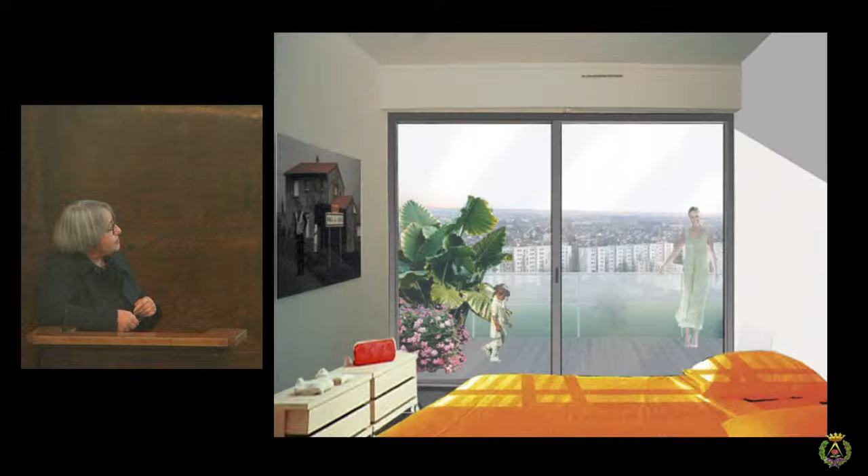From the inside, the same thing: from this poor small window, opening the wall. Very often in buildings of this period of construction, the facade walls are not structural—they're concrete or masonry, but they can be removed without affecting the structure, replaced by a large window and just a small balcony, and this changes the situation.

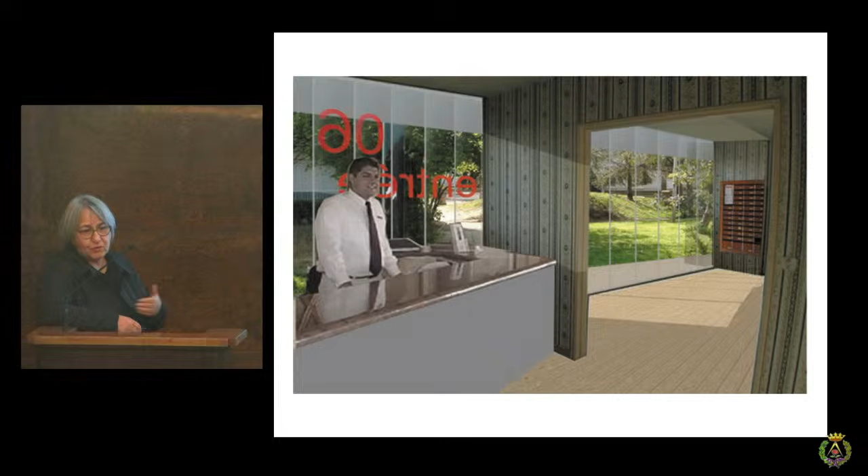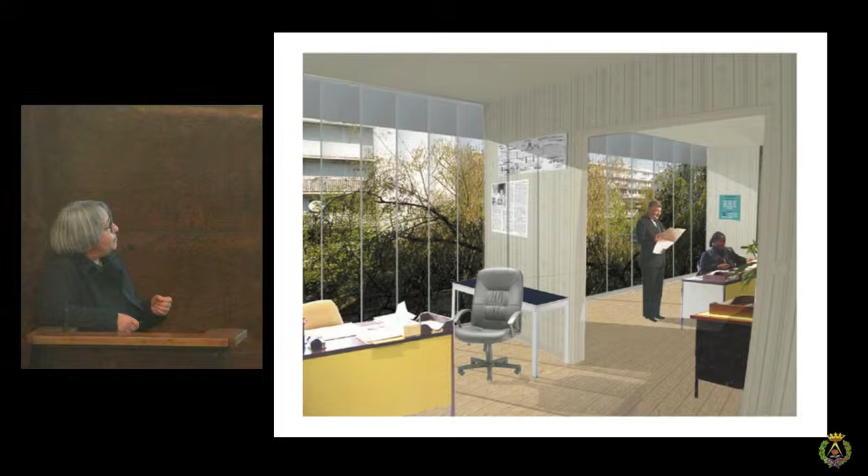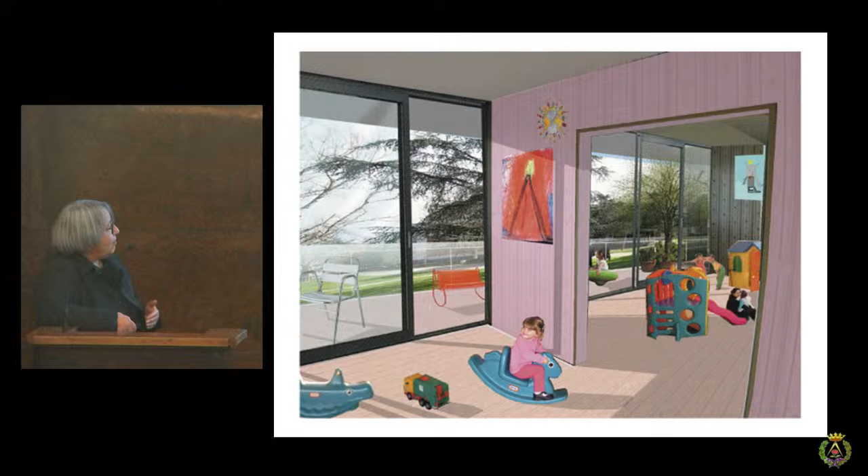But we also wanted to reconsider all the qualities that have been abandoned in many places. For example, the presence of a housekeeper—in most buildings today you don't have this anymore in the suburbs. Or using the first level for working spaces, since it's not the best level for living, or community spaces that today have mostly been closed because the management was too difficult.

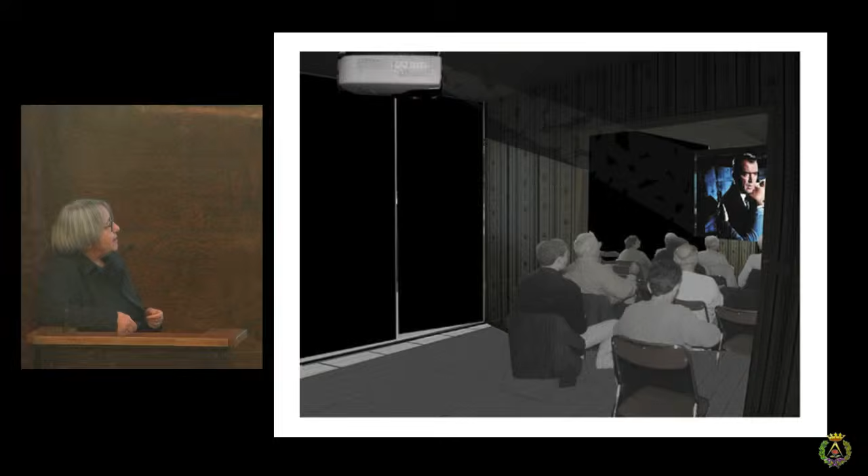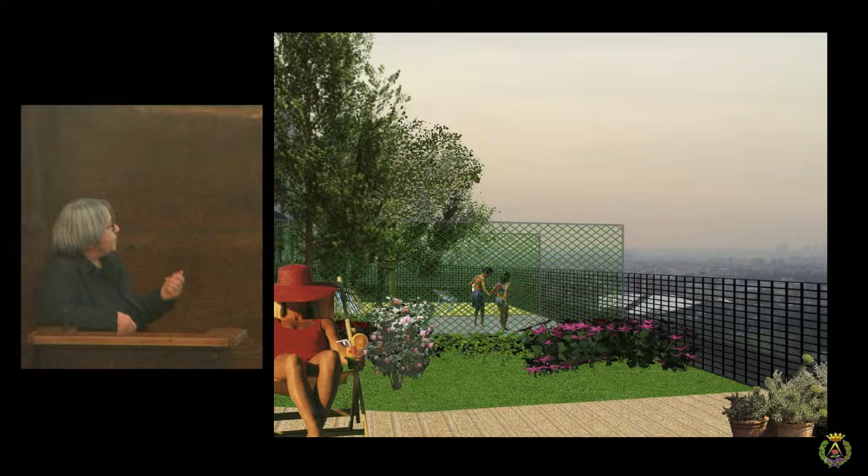So we wanted to reintroduce everything we know today that creates quality and good relationships for a community. Also the use of roofs, which could be easily transformed into community gardens.

And doing this research, we could also compare the numbers, because it's very important to study the cost, the economy, because without controlling these questions, you have absolutely no chance to convince that it's possible. In the case study we did, we could compare the cost: the number given by the government at the time for demolition and reconstruction of standard housing was 165,000 euros per dwelling. In the alternative of no demolition but transformation, we arrived at 55,000, sometimes up to 60 or 65 thousand per dwelling for sustainable transformation, placing all the buildings in a new long cycle of life.

So an example, since after this study we could make in 20 years 3 or 4 projects. This one is the most important, in the city of Bordeaux. We applied to the competition for the renovation of these 3 blocks that the city first wanted to demolish, but finally they didn't, because to relocate 500 tenants takes 10 years. So finally they abandoned the idea of demolishing.

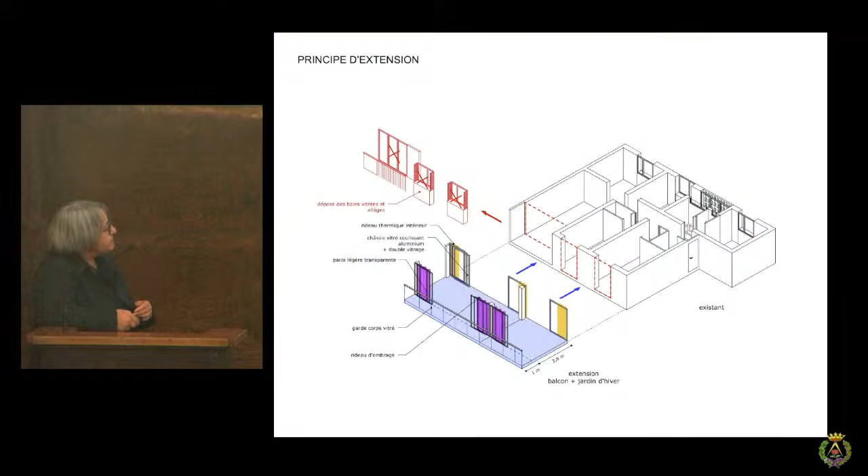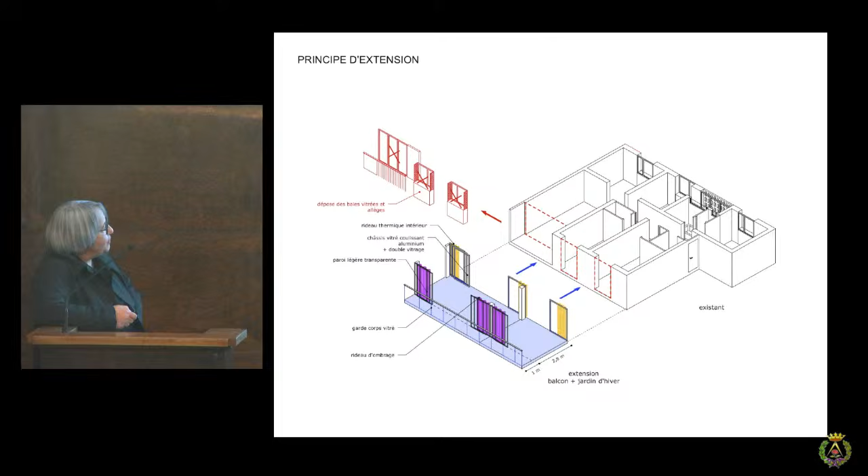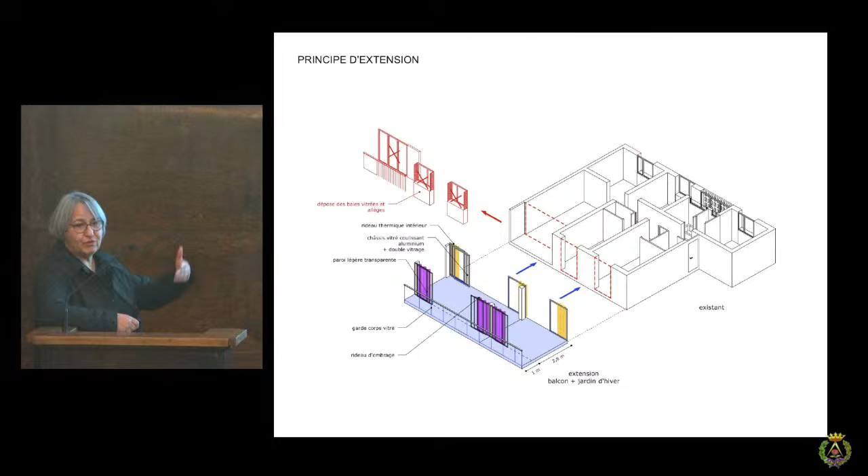So we proposed on these long slabs to make this extension - on one long side of almost 4 meters - and to transform all the small windows into large transparent doors, including this one, so that, keeping the structure of the apartment, we give this extra space in front where all the former rooms are connected with the new space, creating not only additional space but a lot of new mobility inside the housing.

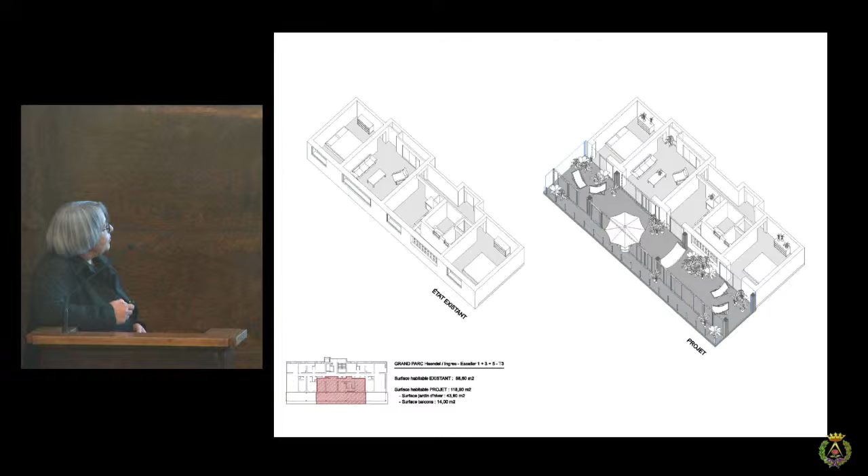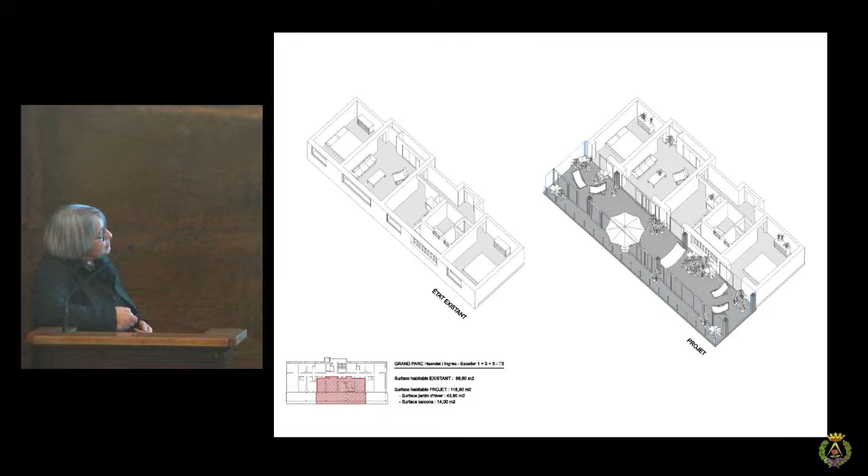So for example, one of these apartments which had a single orientation - with this addition, 60% of the apartments now have 2 orientations. So it means that this addition creates almost the same quantity of square meters as the existing space.

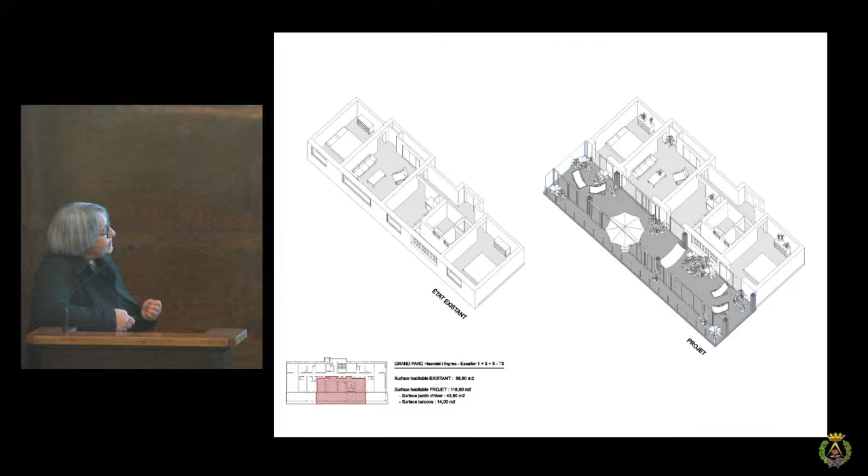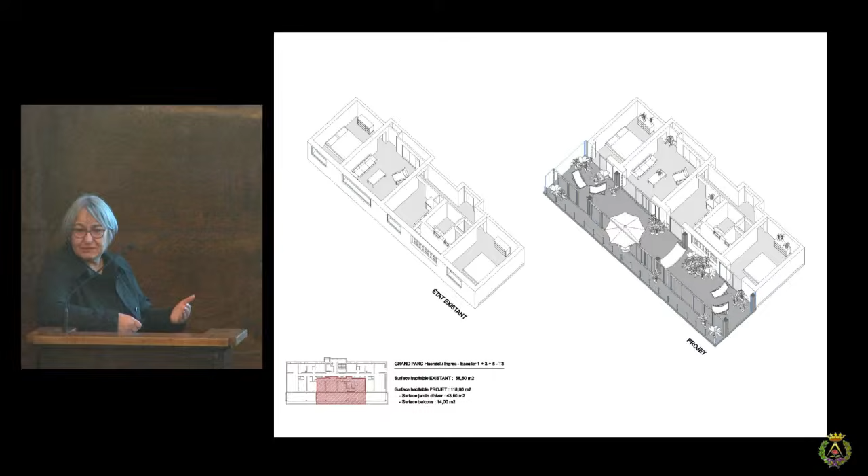Doing this also provides very good thermal efficiency. We replaced all the glass windows, but we didn't have to make any insulation of the existing wall, because the winter garden is proven by now, by many studies, to be more effective than 15 centimeters of mineral wool. And we applied this to all the levels.

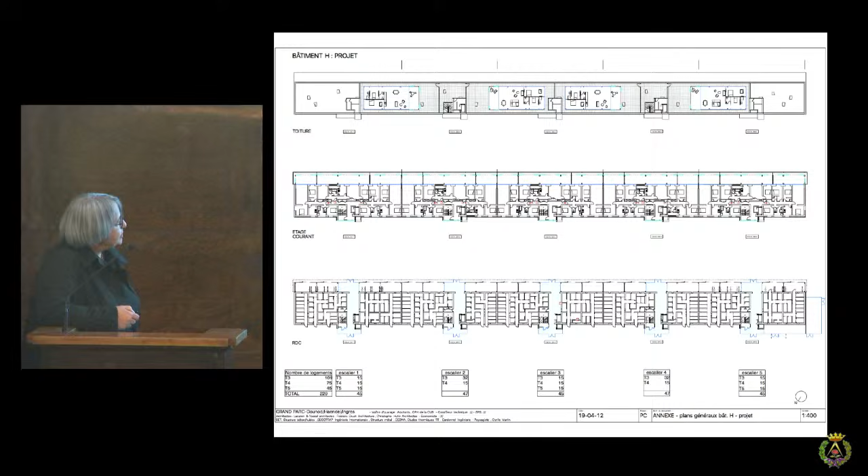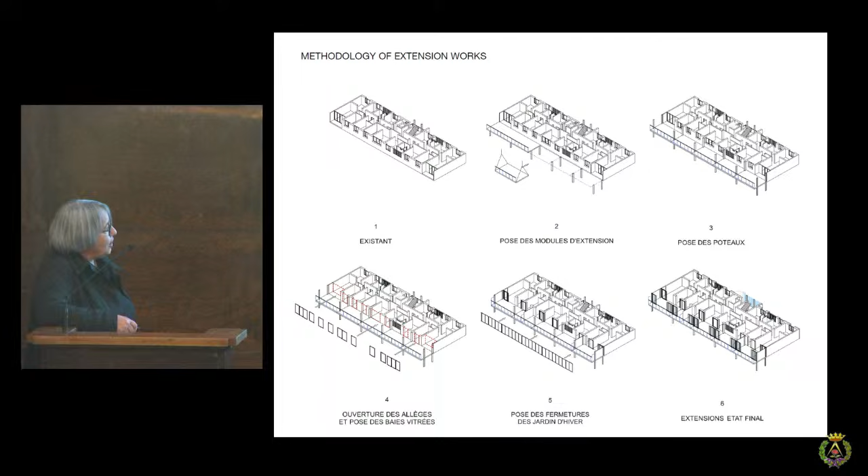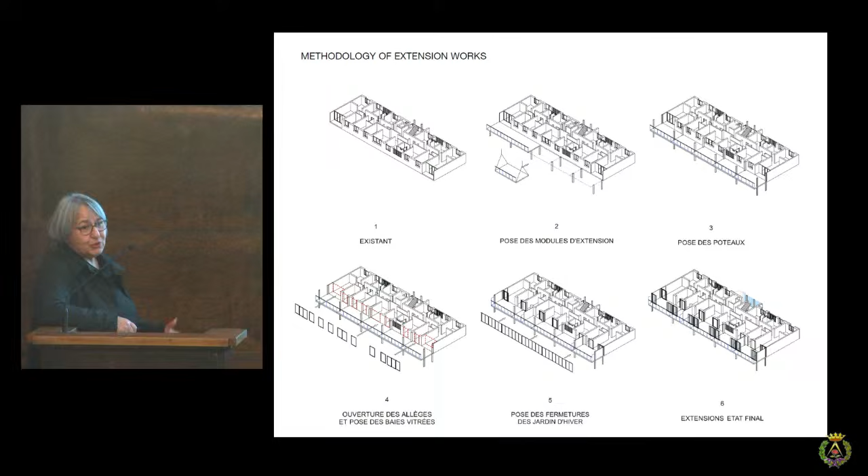On the ground floors there were also interventions to reorganize the entrance hall and create bike or trolley storage. This was also the methodology of works, because working on an occupied site means a lot of things must be very well anticipated to make sure you don't have problems when construction starts. That was the process we proposed at the competition stage.

Then there was also important work made to inform the inhabitants live, first about the guide of the construction, but also an email address or website where they could find all information updated all the time, and how to connect with the group, formed by one or two persons from the client, one architect from the team, and one worker from the contractor, who were permanently at the disposal of the inhabitants to answer any question or help, for example old people, to move a table or something if they needed it.

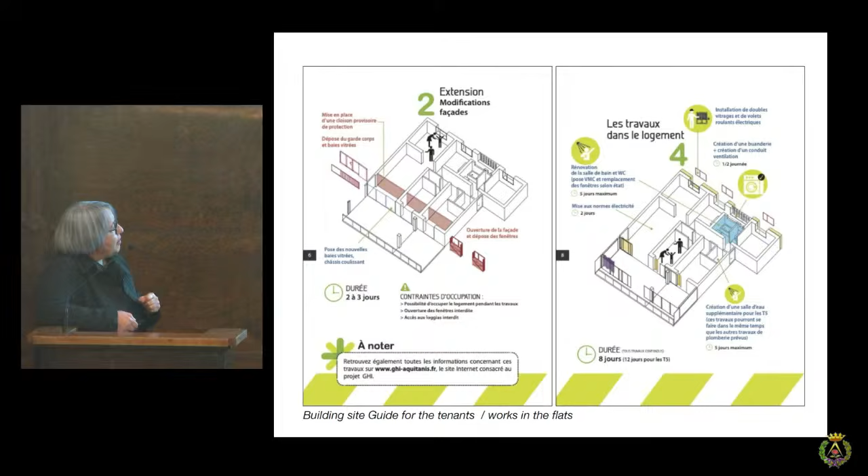This booklet explained in detail all the process, and there was a long discussion between the association of tenants and the owner about how it would be after the renovation, whether the rent would be increased or not, and finally there was an agreement that the total amount would not increase for the tenants.

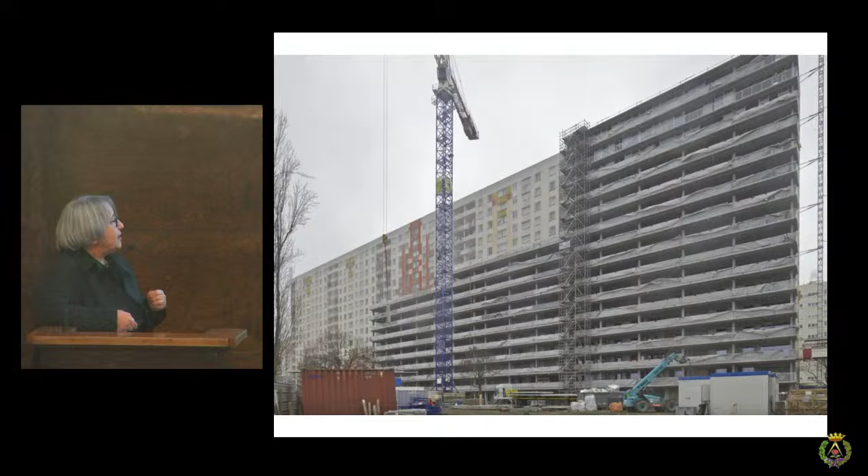Then we started the process of construction on one of the two big long blocks, 175 meters long and 15 levels. The process involved modules prefabricated off-site, brought by truck and mounted on site, and the final result.

The process of mounting was just this concrete module guided by two guys. It's very important because this old construction had very thin floors, so it was important to prefabricate elements that could match this thickness, otherwise we would have lost height.

The construction proceeded level by level, columns, floors, and when we had secured some levels we could start the process of transforming the windows into doors. This process should take no more than two days, that was a commitment, because more than two days was difficult for people.

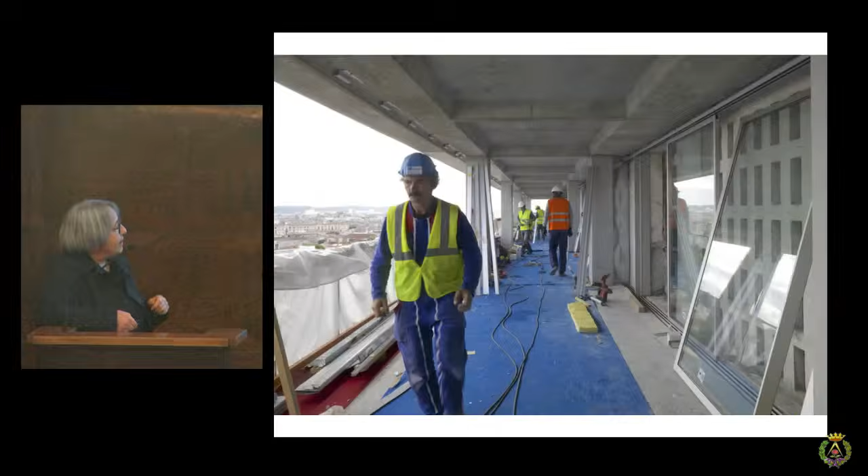The first day we removed the asbestos and the glass windows, and cut the handrail. The second day the glass windows came in, and afterwards we just had to renovate the interior after this change of the facade, the winter garden.

And a few weeks later, the inhabitants could get the use of the winter garden and start their appropriation.

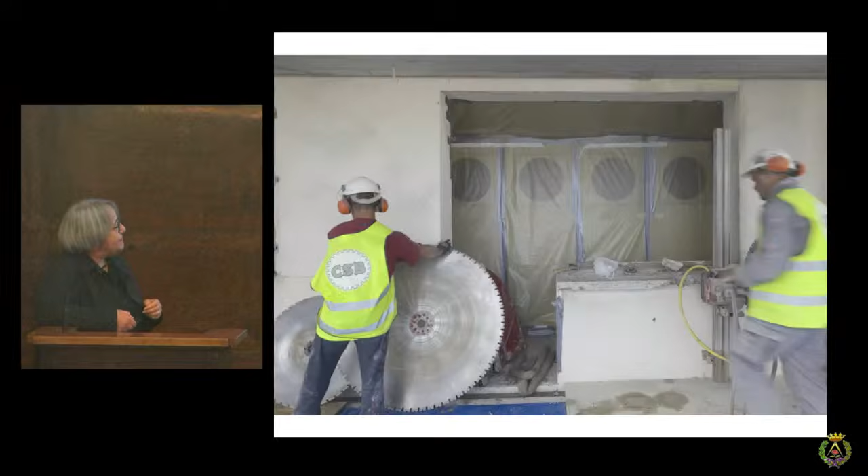Another way to view this: we put temporary partitions behind to protect from the dust and so on, to make sure it was acceptable for inhabitants to stay. So the process of cutting the handrails.

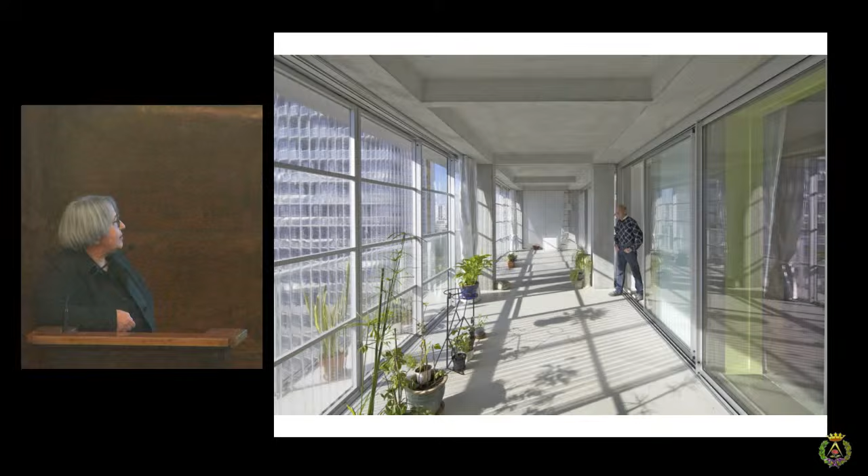The frames come the second day, along with the glass windows, and this was done afterwards from inside. But as soon as the glass windows are placed, the apartment can be closed, and the next step can come with openings to the winter garden and appropriation.

This is a change introduced from a basic bedroom, with the living room getting windows, a large window opening to the winter garden, as well as for the kitchen. This extra space is totally free of function, a place for appropriation.

So the transformation is really radical after this extension.

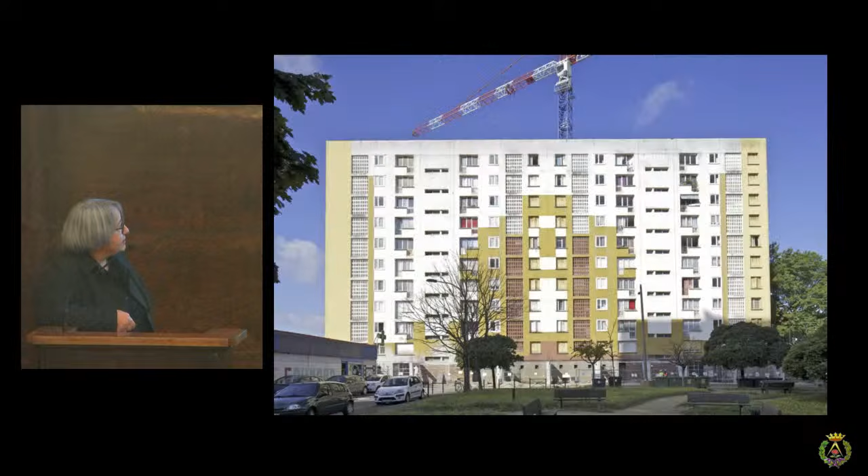We also added a few larger apartments on the roof, because there were only typologies of two bedrooms and three bedrooms. So we added some places on the roof with very light construction, dealing with chimneys. That makes a very interesting plan, with the chimneys inside the place. But very nice case studies with a fantastic view on the city.

And the transformation afterwards, now it's a place where everyone would like to rent, and the inhabitants who stay there and who supported the works now are very proud of their building.

Just a few numbers to explain the benefit that this project has brought. 100% existing conserved, 53% of surface added. More important is that by doing these winter gardens, but also renovating some heating regulation, insulation of the north facade, the consumption of primary energy was divided by 3.

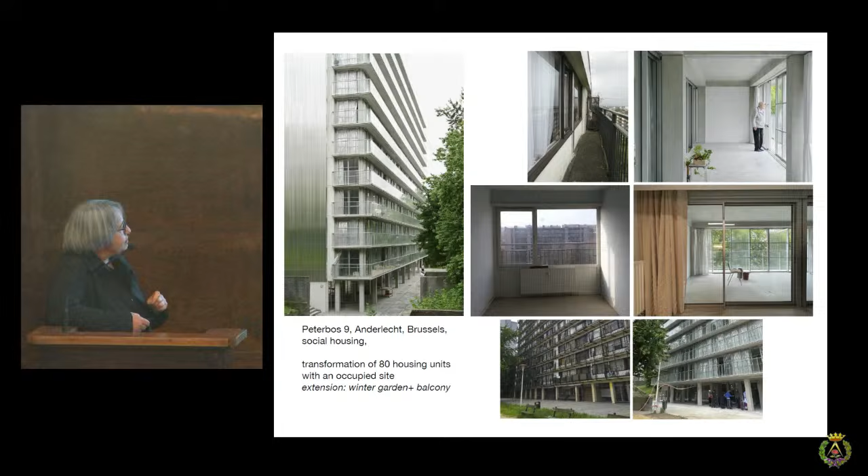And we did 40 additional housing units. So here again it's the process of transforming the existing. The most recent one is in Belgium, in the neighborhood of Anderlecht, where we did a similar process, also on an occupied site, and we completed it very recently.

So the transformation, as we are now convinced, is a very important opportunity to upgrade massively the quality of housing and to provide very good housing for all, affordable, with less money and in a more sustainable way. It's important also to observe that you can find this kind of situation in huge numbers in the city, everywhere.

It's important to think that every building, every dwelling can be transformed, every plot can be increased at the right measure, sometimes a little, sometimes not at all, for a sustainable and qualitative densification, and for the benefit of living space, uses and inhabitants, which is the most important aim of designing housing.

It was in fact in the context of a study kicked off by the municipality of Bordeaux, because they plan to build 50,000 new dwellings in the next 5 to 10 years, but they didn't know where to find the place to do it. Finally, they saw that it was good to build around the new public transport.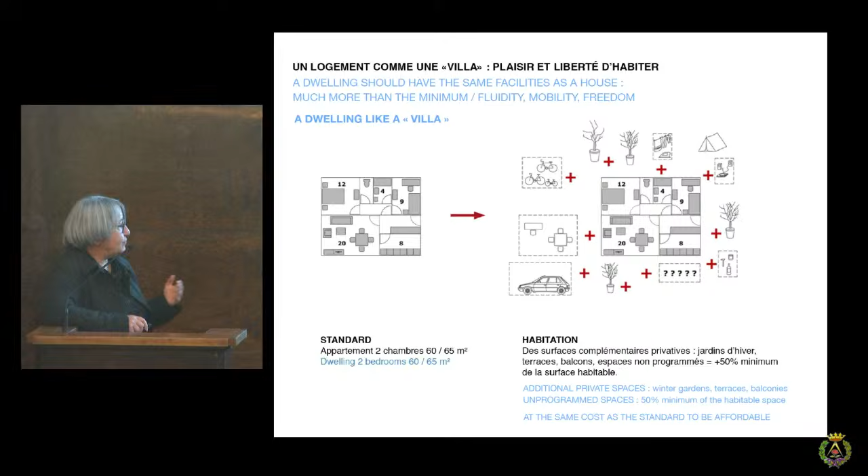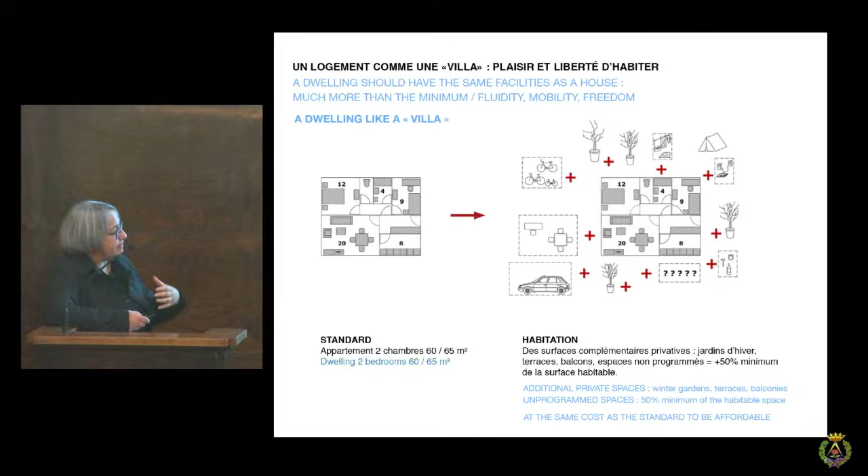So for us, all of this is important. Maybe it's not a car, today maybe we don't need one anymore, but this kind of extra space, which is given to the freedom of every person.

So we started. I'll go very fast because this house was built more than 30 years ago. We did it, but it was our goal at the time, for this family of workers with low incomes who wanted to build their house.

As young architects, we were really involved in doing something much, much better than any standard that they were ready to buy from a catalog. So we introduced here this principle of building double.

It means that if you need 60, 65 square meters for a 2 bedroom house, we can build 150. This is what we did for this house, with this greenhouse exposed to the garden and to the east, which is also very important in terms of climatic comfort and efficiency.

Finally, this space has become an extra living room, not at all a greenhouse, but an extra space, which is the place that changes the most often in the house. Because inside, the sofa is always in the same place, the beds too, but this place is always changing during the seasons and according to the mood of the people.

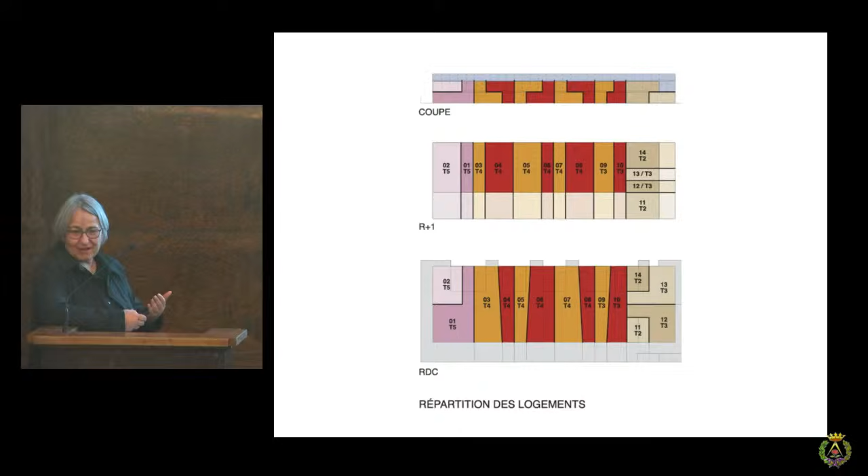But it's important, because if you talk about extra space, it doesn't mean that all the spaces are similar, and having also some darker space inside the house can become a quality too. So we experimented with this, and it worked very well.

The construction is very simple, because to keep the budget, it was important to think about how to build this space. We used prefabricated construction to make this concrete table, and on top, 3 rows of agricultural greenhouse that we used with a whole system to regulate the climate inside.

And this is the result - for example, this apartment has this part here, plus here, and a winter garden. So the result is, for example, for this apartment, a 4 bedroom dwelling in duplex.

The surface is 165 square meters, while the standard requested was 100. The construction cost was in 2005 - just as a comparison - 90,000 euros net, exactly the same price as the 100 square meter version.

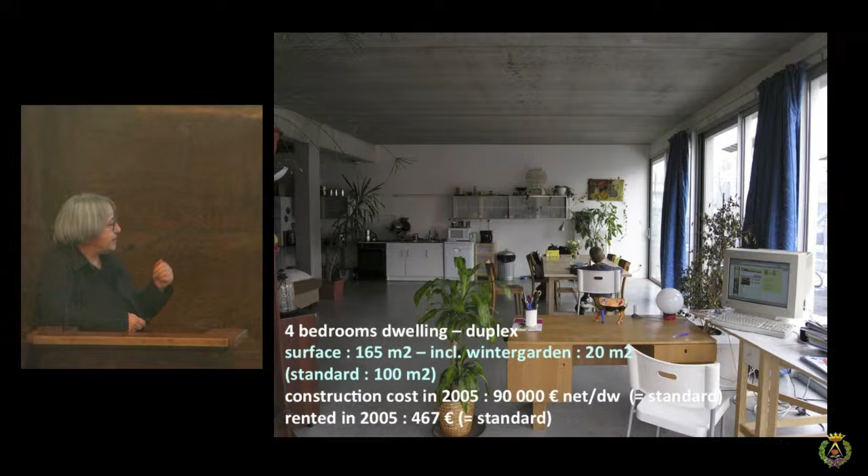And our client, the owner, was very good, because we discussed this issue of more surface, more rent, which is always the answer you get when you want to do more, to give more. You get this answer: no, you cannot do that, because otherwise I should increase the rent, and it's not affordable anymore for social housing. But in this case, because this client was very open and wanted to change something in the way they were doing things, he accepted to revise this strategy.

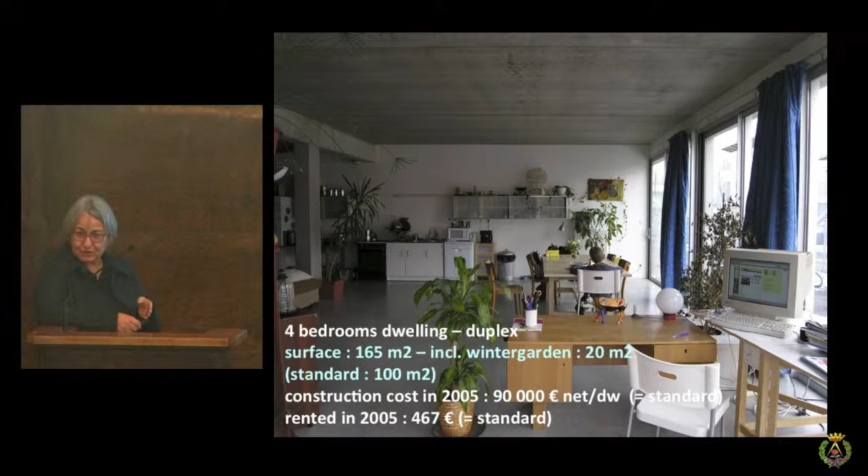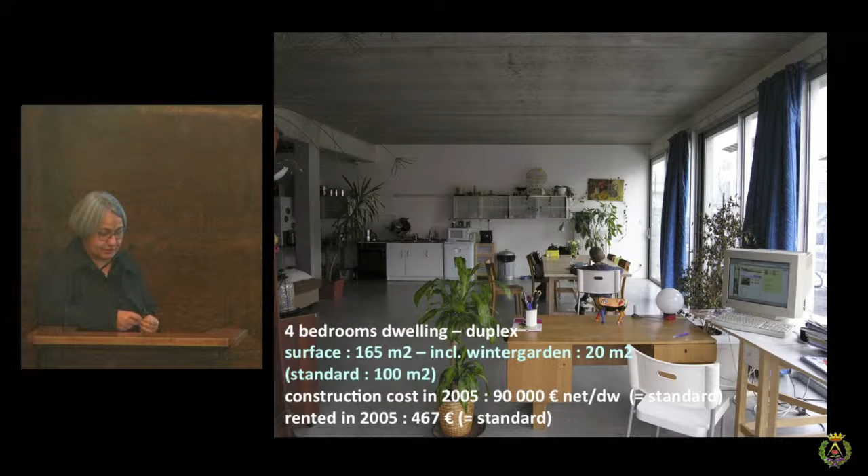Finally he said, but in fact it's not a law, it's a practice that has become a law. So finally, I don't feel forced to respect something which is not a law. And he decided finally not to rent based on square meters, but based on the cost of the apartment - as if we had made 100 square meters for the same cost, the rent would have been the same. So of course, it's very interesting when you can work with people who also have the desire to invent in their own field.

So we already experimented with this - this was completed in 2005 - with the whole system of deep facade with 4 elements, thermal curtains, and very recently we published research with the engineers of Atmoslab. Raphael is here.

They recalculated, because at the time, in 2005, there was no real calculation, just a kind of intuition that we arrived to convince, based on a very accurate study of how greenhouses are working, especially with cross-ventilation that immediately cools down the space, or the sun immediately brings a lot of temperature.

Finally, because it was subsidized, we had to prove also that it was working. But it was difficult.

The administration said no, you will not have the subsidies because it doesn't work. So finally we went to the Ministry of Housing to ask for a deviation, and we proposed our project with our very intuitive calculation demonstration, and they laughed a lot. But they said, we laugh, but it's because you are very clever, and of course your project works amazingly well, but you are not able to prove it because the models don't allow these kind of things.

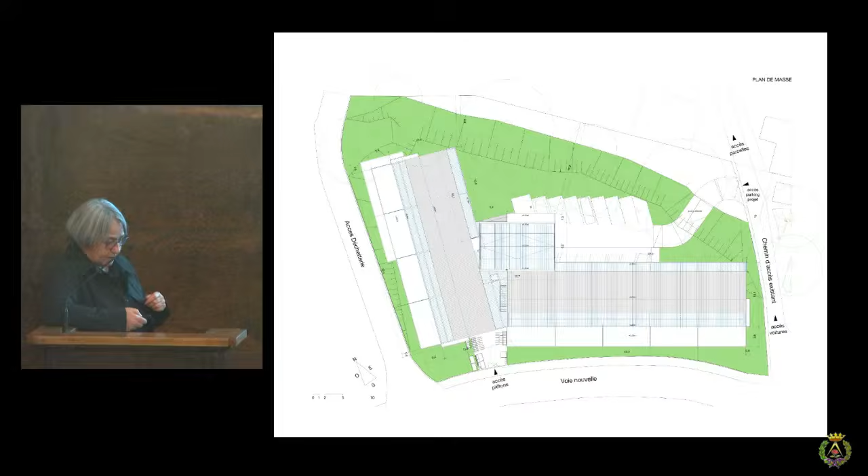Which has two levels - one level for the summertime or springtime, under a greenhouse, but we have a similar one on the ground floor for the winter, which is inside and heated.

All the apartments, which all have one bedroom, kitchen, living room, around 52 square meters, have this additional space of winter garden plus a large terrace, which all in all makes something like 100 square meters of usable space. Again, this extra space made by this complex facade.

We call that winter garden, but in fact it works as well in winter as a buffer zone as in summer, when it's totally open as a kind of loggia protecting the facade from the sun ray. So it has, in a way, two interesting climatic actions.

So even the bathroom opens to the corridor, which was in a way well accepted. And for the ground floor, instead of a terrace, they have winter garden plus a garden.

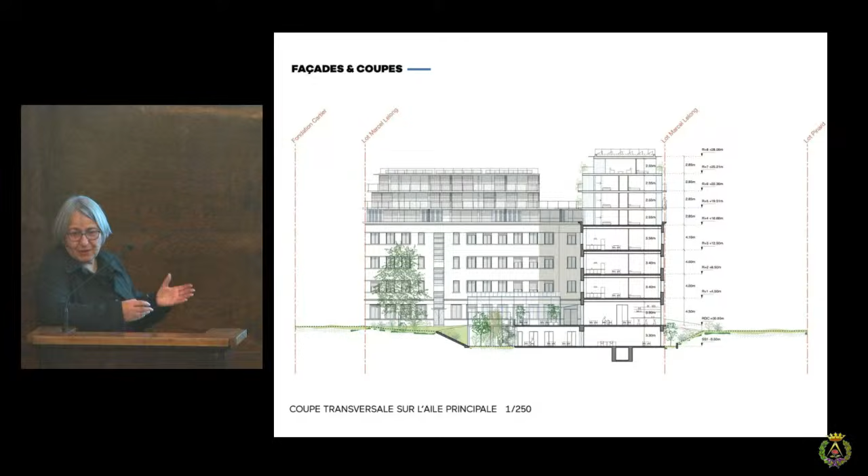So the proposal was to keep the building as it is, with a simple renovation and reorganization of the space inside, and to create additional levels on top, with very little need of reinforcement, because it seems the building already planned in the project to accept more loads on the foundation. So we have not many reinforcement works to do, following the shape of the setback and so on of the city.

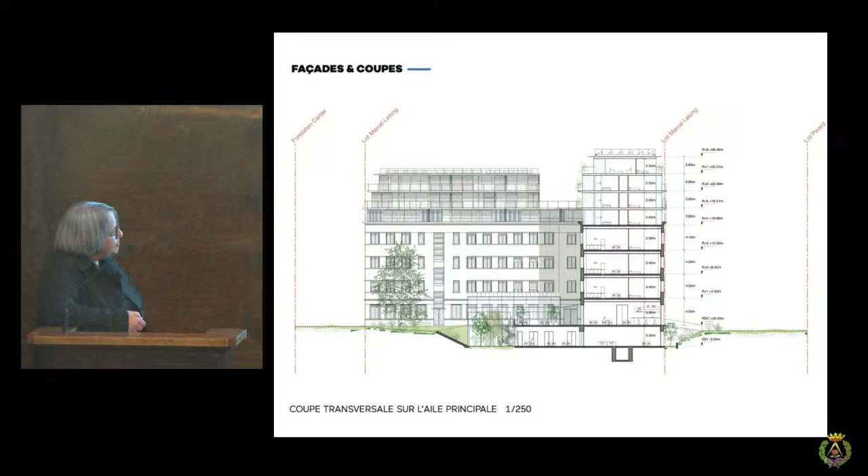So we have proposed this section with some levels which are half in basement, half outside. The proposal was to reuse all these parts here as atelier, but some places here for a cafe, community space, and to have all the housing above this level, from the first level in the existing and the new spaces.

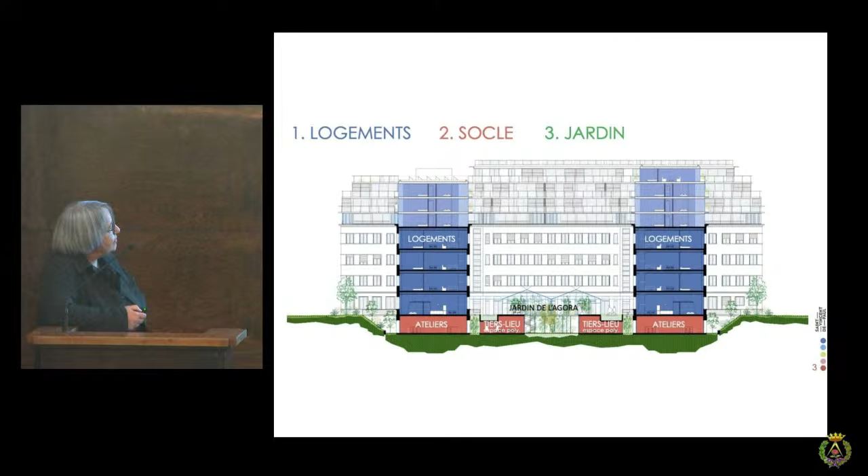So this is renderings. We didn't start construction yet because it's a very bourgeois neighborhood, and for all the new projects here there is prosecution from the neighbors because they don't want to see anything changing in their neighborhood, and because they claim it degrades the value of the place.

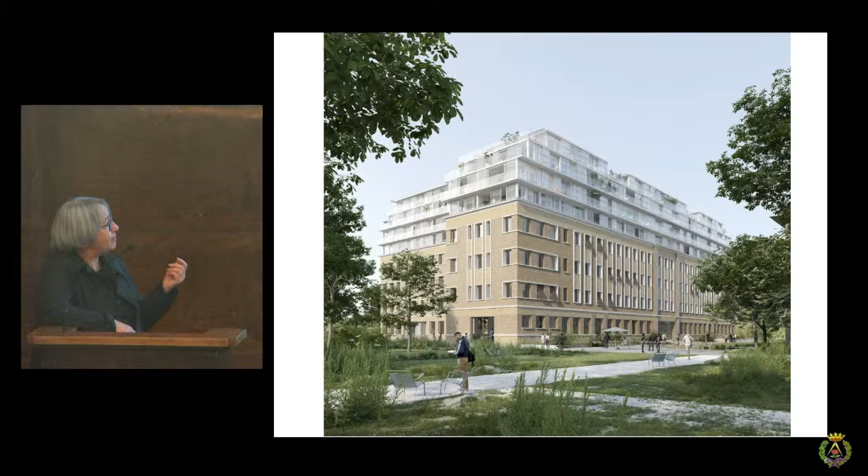So for 2 years we are waiting now for judgment. And finally, the judgment just kept a very little argument. Maybe now we can start soon the construction.

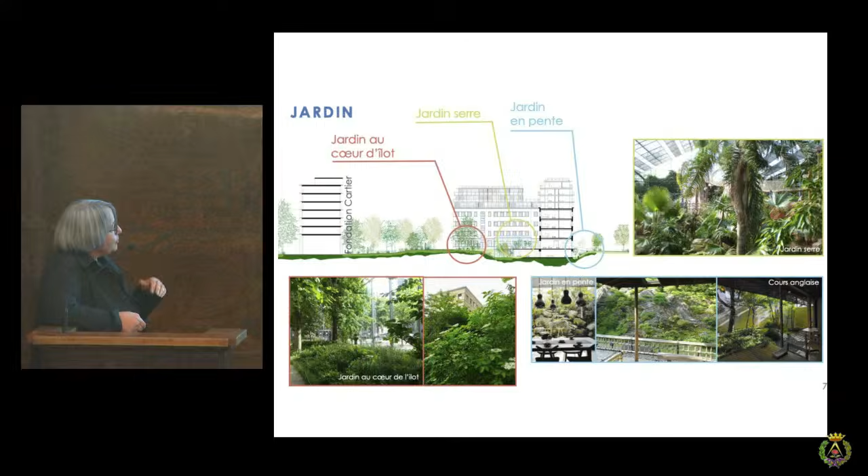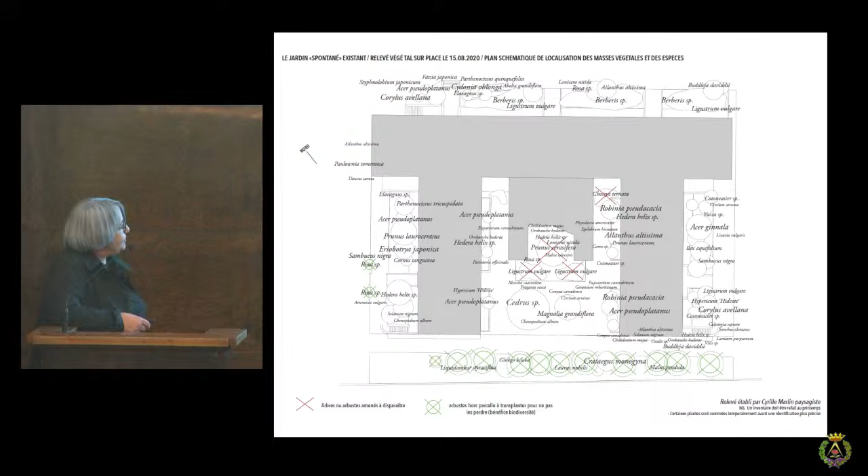We also did, because it was a very old garden, an investigation with the landscape architect on all the existing plants to keep them at the maximum. They did a survey of all the plantation to make sure that, except those already dead, we can keep them and integrate them in the garden. We have just added this greenhouse, which is recovering a former barrack that we removed just to change it.

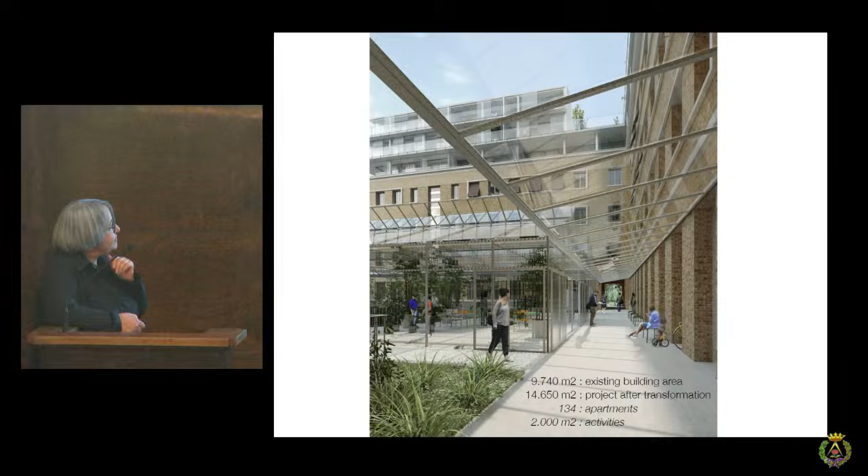So this is just a few numbers: 9,740 existing square meters, 14,000 after transformation. That means 130 apartments, all of them more than 100 square meters, and 2,000 square meters of activity. In fact, what we try to do is use the existing structure, as I told you there was just some columns, but we try to use it without changing too much the structure.

So almost all the apartments have double orientation, with a rule that every living room should have at least 3 windows, and a fourth one if the kitchen is connected. This gave us a kind of measure, because the client is a private developer, and immediately he asked for cutting into having a corridor. But finally we arrived to keep the strategy, and finally it's accepted.

As well as a strategy of not doing any difference between the 20% of social housing and the private housing which will be sold. So we don't know where they will be located, because we have insisted to make them all similar.

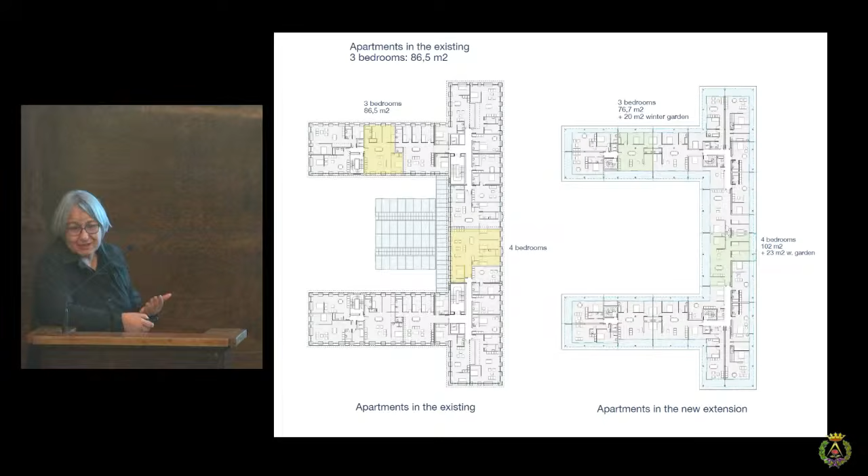And in the new part, it's a different organization, because here again it was not interesting, neither possible, to open the windows, because the quality of light is enough good inside. So there was absolutely no necessity to change anything. We just took care to give enough windows for any apartment, while in the new construction we have this winter garden surrounding the construction and all the apartments which are inside.

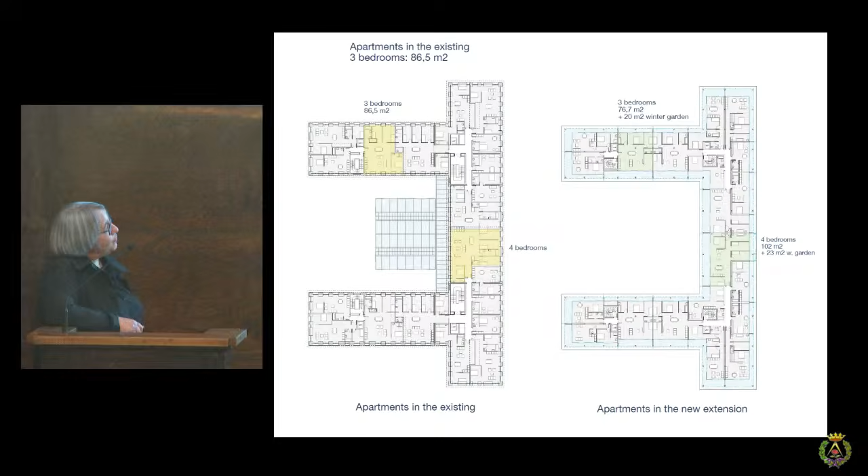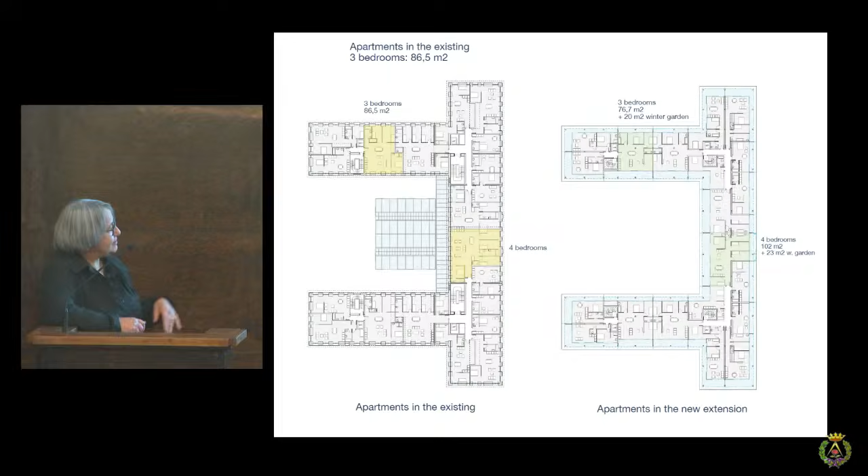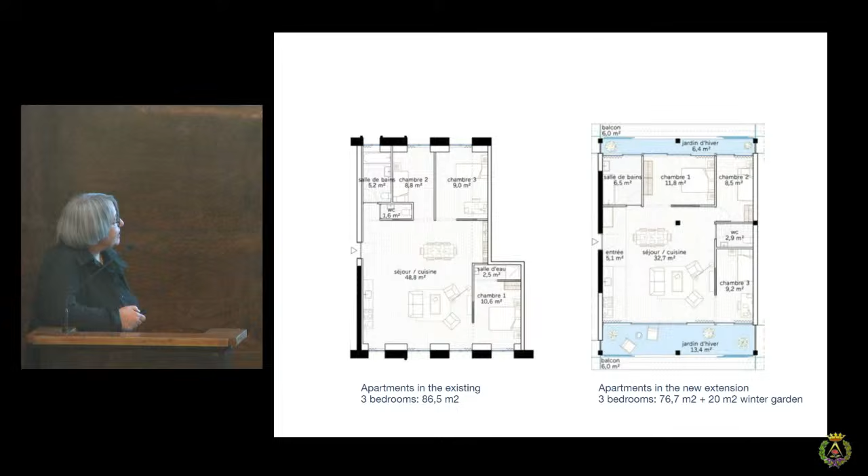4 bedrooms here of 100 square meters, and here 3 bedrooms of 76 square meters plus 20 square meters of winter gardens on both sides, which is also very efficient for energy saving, because the city of Paris has a very high level of requirements in everything. We should not send any rainwater into the network, so there were a lot of things we had to address. I won't explain more, but just to show you here the windows of the existing building, and this large apartment, because we use the full depth of the existing building — and this is the new apartments.

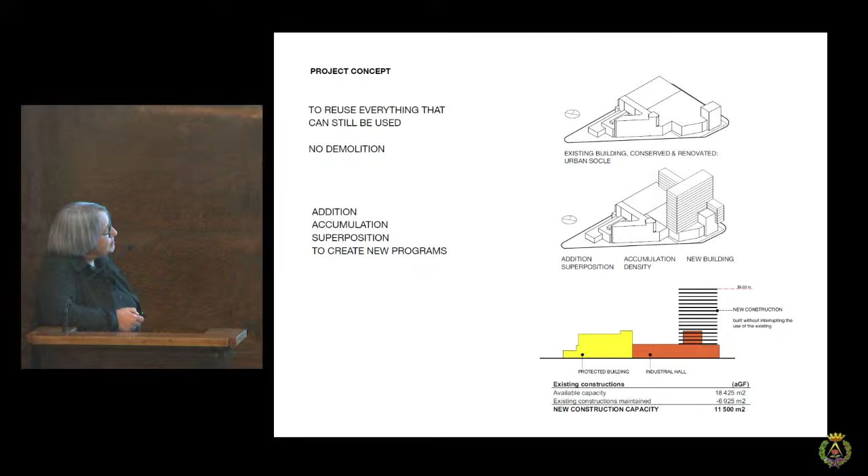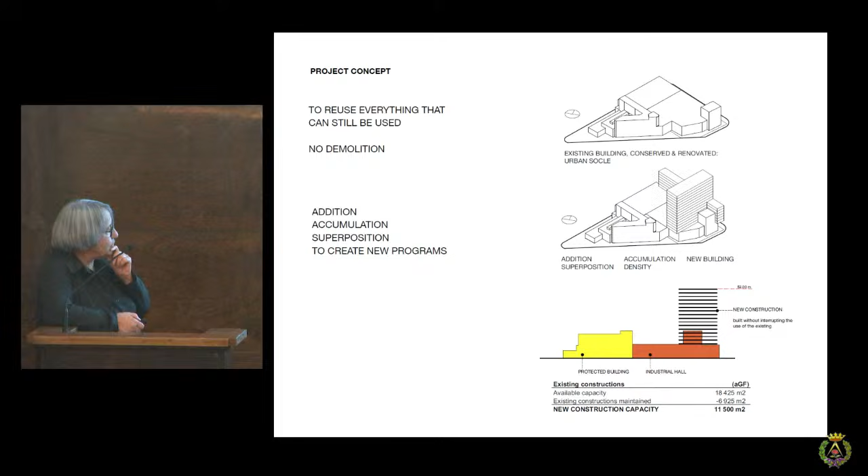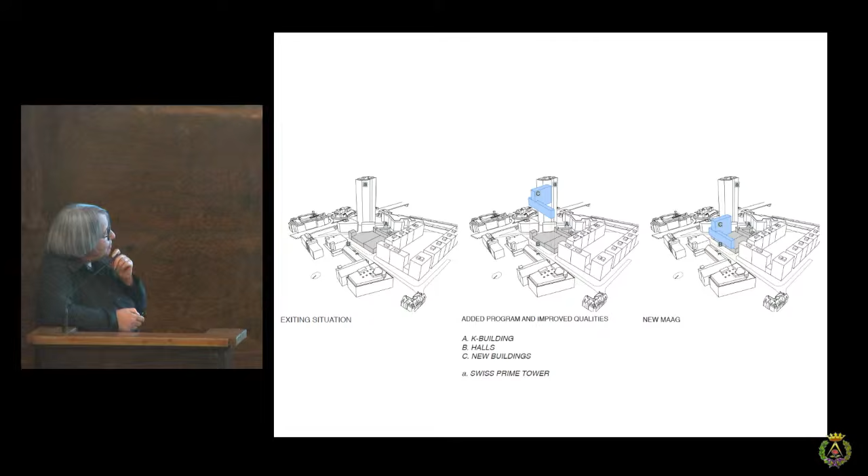Following our general strategy, never demolish and so on — today this is a very popular place where you have a lot of concerts, and also the Philharmonie was there during the renovation of their opera house. In the competition, we proposed not to demolish, to use everything that can still be used, no demolition, and to proceed by addition and accumulation, creating new blocks which take the columns in places which today are not used for the concert halls but more for storage, or this one on the edge with all the columns outside. We reconfigured all this construction into a new one with the existing kept — the protected building, but also the industrial hall — and added all this new surface. In a simple way: the existing situation, these new buildings, but all the other buildings are kept, and we adapt, reuse, reformat spaces inside.

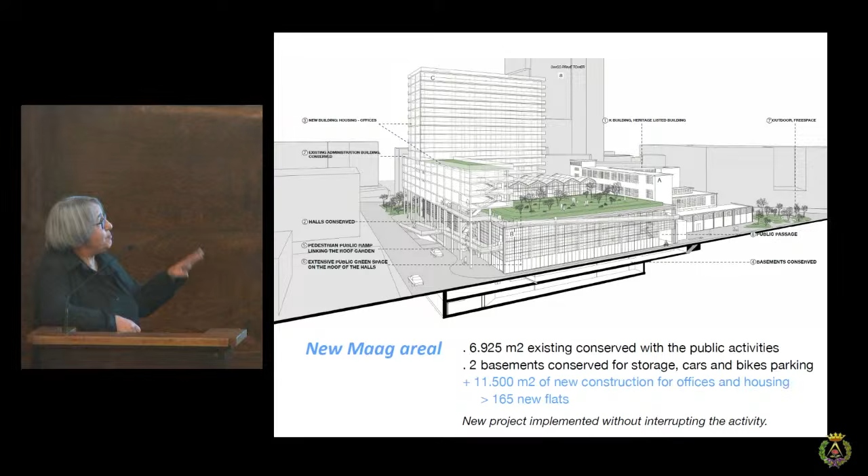So finally we lost the competition, for a simple reason: there was a new master plan. The new master plan asked for a larger street, and the new limit for construction was there. But because we were keeping the existing building, we were outside the limit of construction of the master plan. So in a way it could not be accepted, which is a bit ridiculous, because this building was there before the new master plan. There was a huge discussion in the city, a lot of protest. So finally, the situation today is that nothing has been built — it's still the same situation. But the city has cancelled the master plan and agreed that this building should be kept. Of course there will be another project, but finally this competition helped to change the city rules.

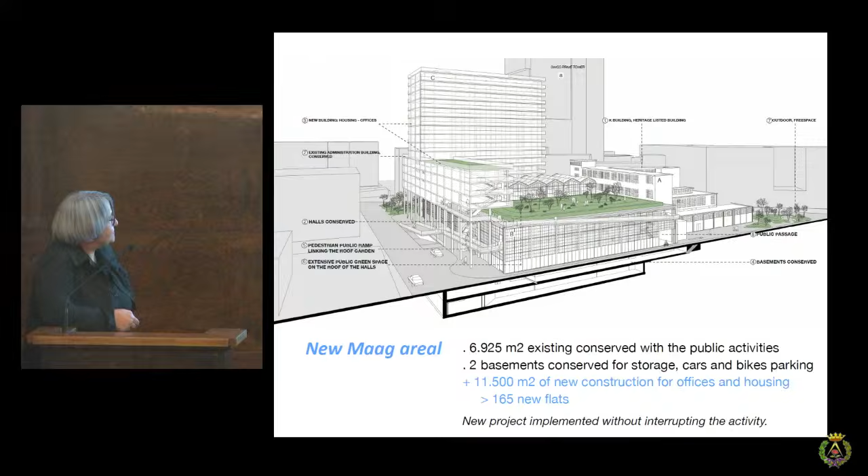Okay, and these were renderings of the situation — the old concert hall, and all these new apartments above the existing. So without wasting the existing, still in use and in good state, with no loss of quality, no loss of usage, and in fact a project of densification, of optimization of the city ground.

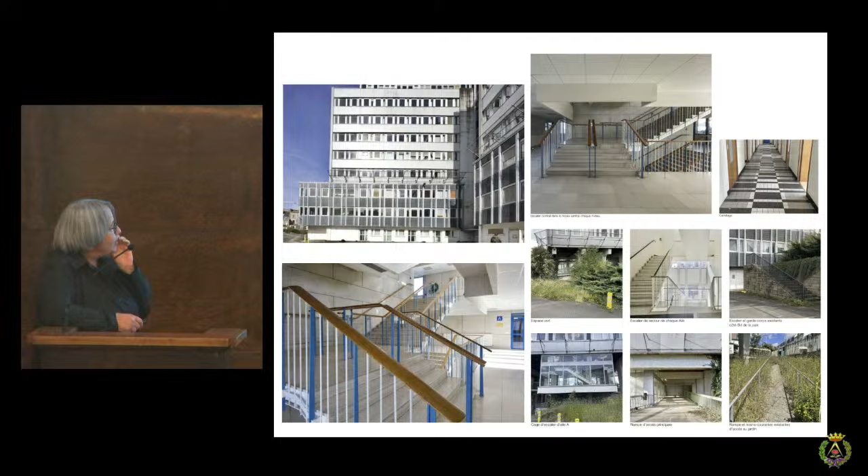And very briefly, a last one that we are currently studying: a transformation of an office building into housing. It's I think a pure typology of administration building of the 60s, where they were collecting taxes and so on, which is vacant — built in 1967, and vacant since 2020. The state has sold the building, and the company that bought it asked us to make a project for transformation into housing. One of the first actions, as with the housing blocks, is to make the catalog of what we call qualities and values, to make sure they stay in place and that we don't destroy what is already good. And we start from this.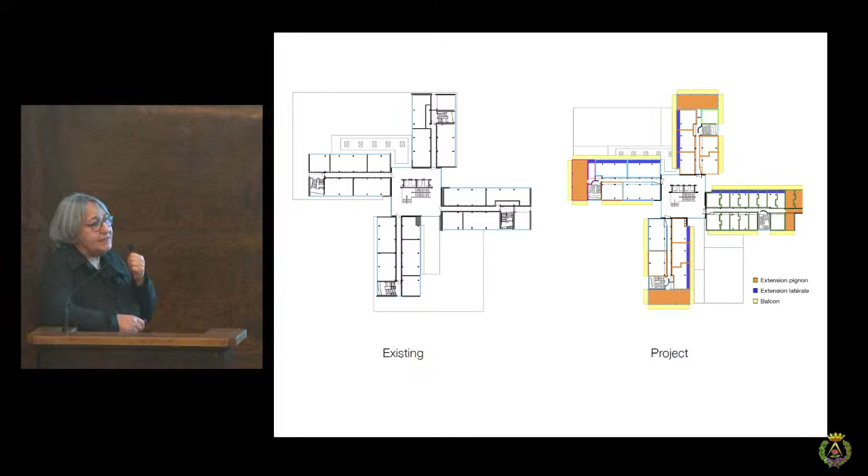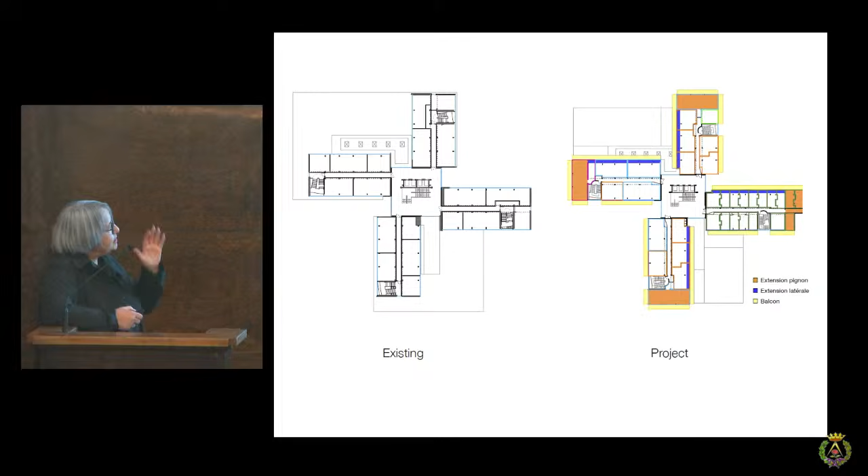But finally, we did the choice to make some additions on the gable walls here, which are blind walls, to create additional space with new facade, transparent facade, so changing also the quality of the building.

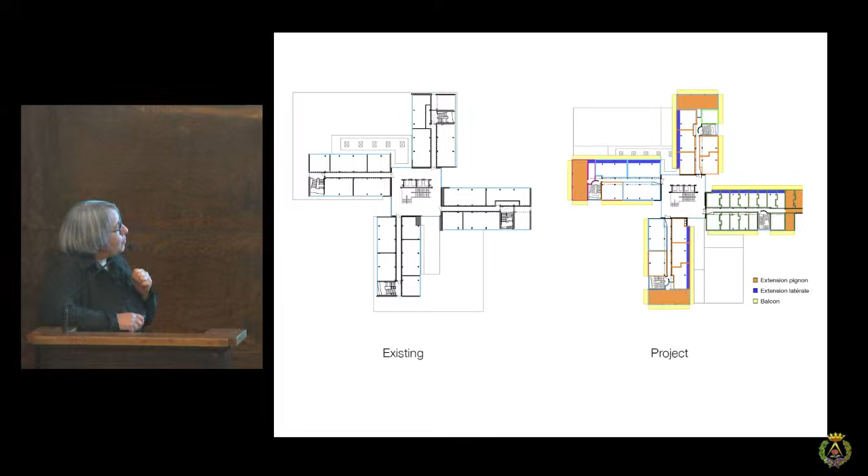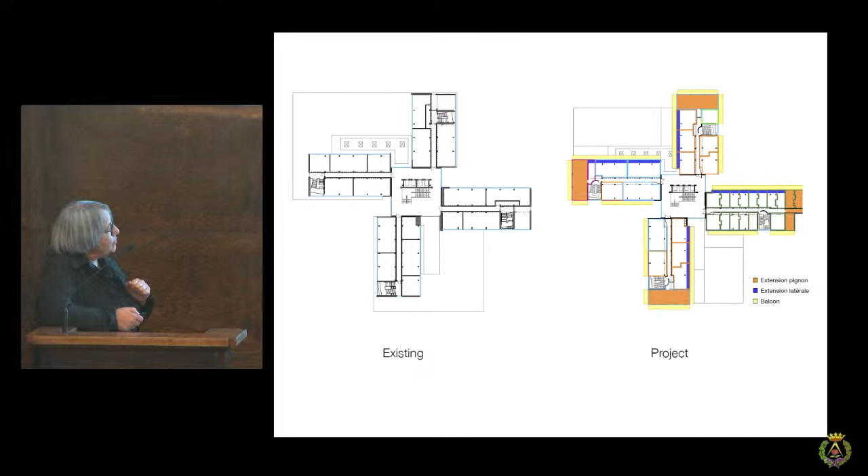And here some additions to extend a little bit the width and make possible to have two on two sides, one single orientation apartment but with a normal side, and to change the axis of the corridor. And all around this yellow space is additional balconies.

And this is the transformation. We could keep the activity on the basis with 3 levels, and also create 88 apartments plus 90 student apartments. So now this project is going on well, and we should start the construction in the next spring.

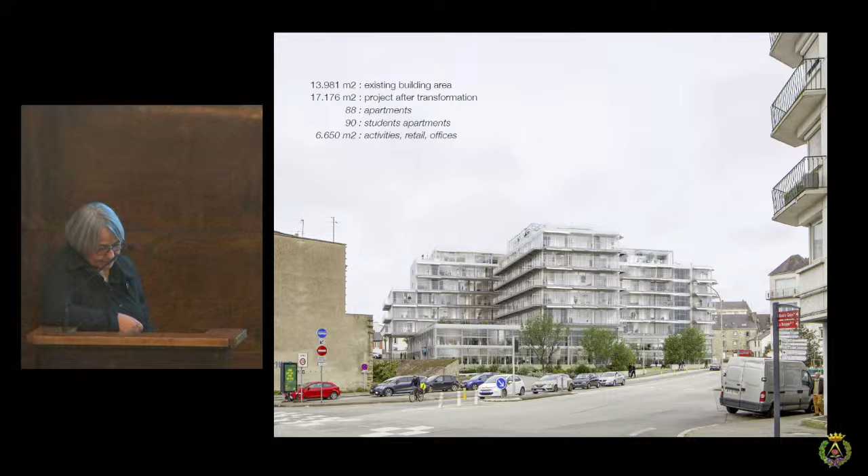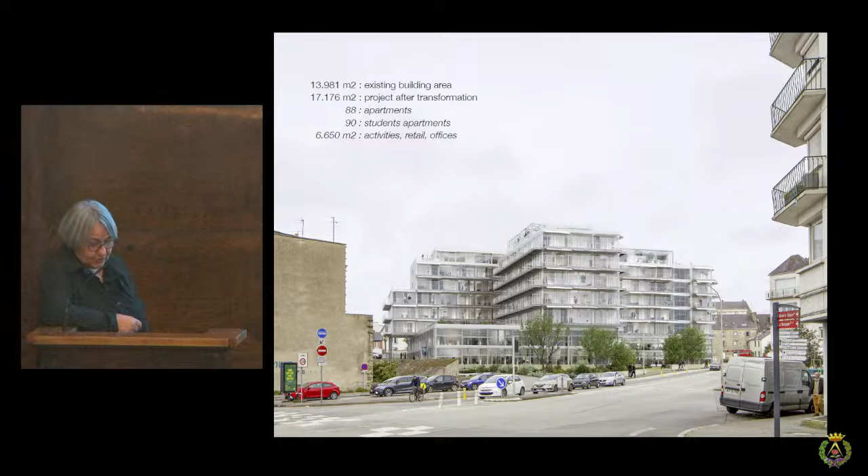So just to conclude, and to come back to the housing and what makes, in fact, the good housing, and how we could try to struggle against this crisis of housing. It's important to consider that we need, and it's a priority, to rethink the basis of the quality of housing, to state housing as a major challenge for contemporary society, to define the imperative qualities that any housing should have always, without any distinction of social class, of category, of budget and place.

And it's important to consider this, that quality and generosity of housing, affordability, diversity of people and ways of life are the essential conditions to make the city, and to try to struggle against the principle that housing should be removed from its financial and social classification.

It's about opposing the principle of housing as a financial project, which, to my opinion, is one of the causes of the crisis today, and to return to the idea of quality, inhabiting, freedom, pleasure, and luxury for all, as Mrs. Ramos is saying in Winter Garden in Le Grand Parc in Bordeaux.

In my winter garden, I feel very free. So thank you very much.